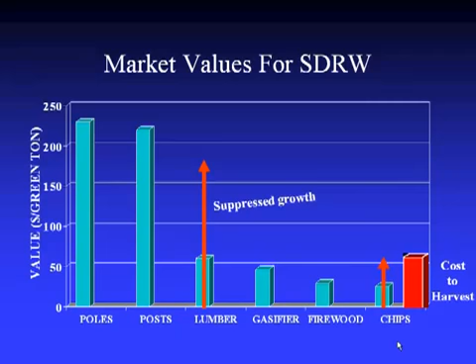So when we look at, and now this is mostly small diameter material, because that's the stuff we want to pull out of the forests to the ladder fuels that carry fire up into the canopy. If we are going to use that wood, we can see that it costs maybe $70 a ton to pull it out of the forest, and every 50 miles is another $10 to move that stuff. It's getting pretty expensive, and can they pay their way out of the forest is the issue.

So we can see that posts and poles have come way down with the housing market drop. We can see that lumber is moderately low, but then it went up if you had suppressed growth. I'll show you a slide where we're taking some slower grown wood, and you can actually make 2x4s out of a 2x6. So that made it more valuable, but then again with our housing market problems, that has dropped back

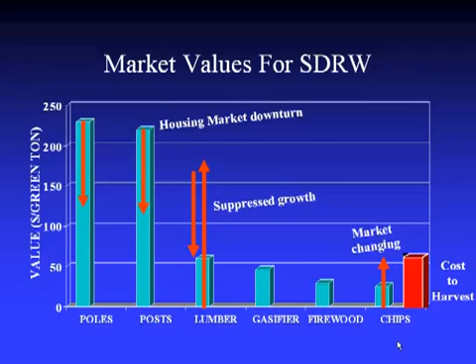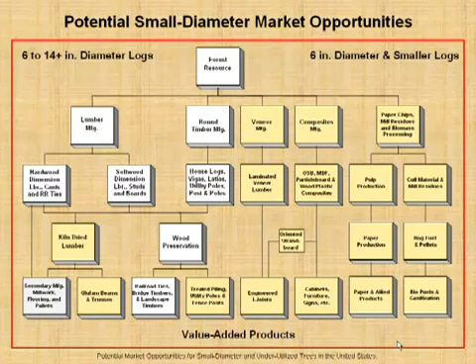down. So there's all kinds of things that the wood can be used for, and most of you people probably have some feel for which way you want to go or you want to investigate. And I'll throw out a few things in this presentation. And like I said, we want to come back and work out all the bugs before you enter into some of these things, because there were some issues where some people jumped on something and they made a few mistakes.

Years ago, there was a whole industry who were making wood foundations for homes, and that industry is gangbusters in Michigan, and it was a disaster in Wisconsin because a few contractors didn't follow the rules. It turns out it's a good idea in many instances.

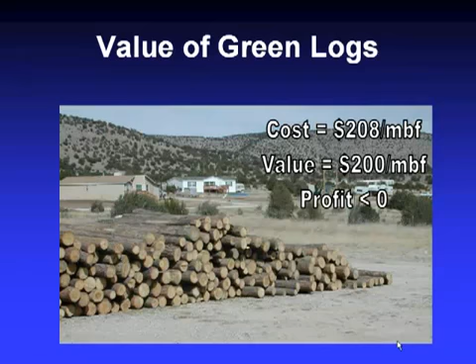So we can see here, you have some logs. They cost more to harvest than they're worth. Same sort of thing, it can cost a little more to turn it into lumber, and that value could also be less than what they are worth. However, this value added, this is a company that is in Northern California.

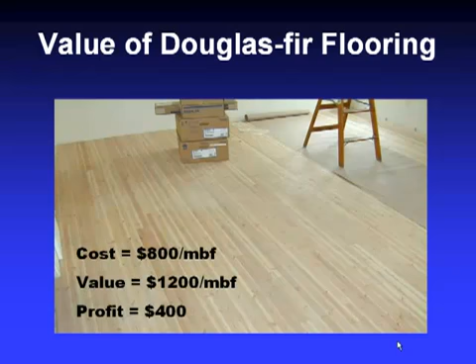They took very slow-grown Douglas fir, and some of these trees were more than 100 years old, and they were still only 4, 5, or 6 inches in diameter. So there's tons of knots, and it's a very pretty wood, and it's a whole new type of market. And the same sort of thing happened in Montana with some western larch. That was also an overlooked species, and it is paying its way out of the forest.

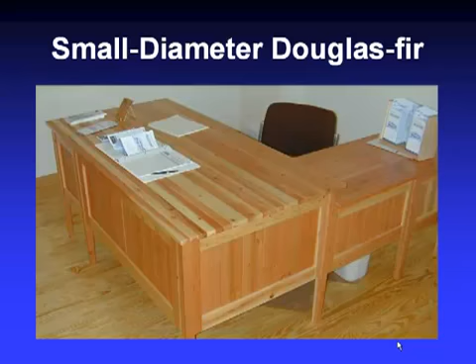Here's that same Douglas fir made into some furniture, and that's very attractive. So we can see there's all different types of things we can use the wood for. Unfortunately, energy is at the bottom end of that value stream as far as how many dollars we can get per ton. However, because the other things have been dropping, they're getting closer, and it's not such a bad deal

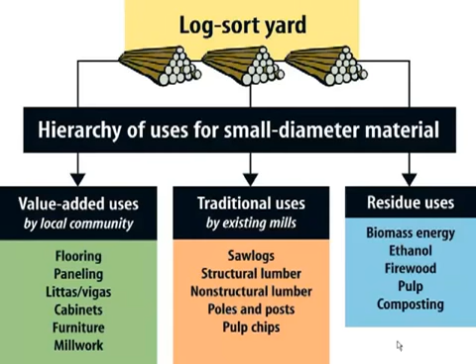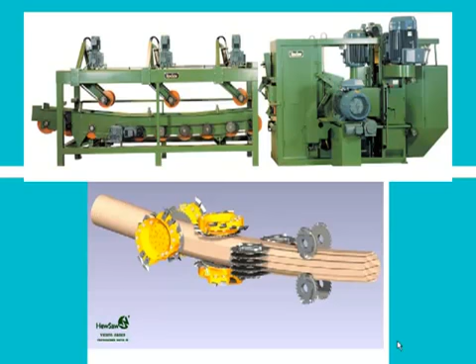anymore. Here's one thing: if we have some small diameter material and we put this in what we call a HewSaw, and there's some negotiations going on, and this particular machine may be coming back to the west. And here we can see the logs have to be sorted ahead of time, because this particular machine doesn't sort it, so you set up the knives ahead of time. It can get 20 logs per minute through this thing.

And so now like I said, we have to have the right type of wood. I have the little juvenile wood part of the tree. The very center is kind of flashing there, and the interesting thing about juvenile wood, it has a totally different cell structure. And if you ever went to the lumber yard and saw the 2x4s that were quite warped, if you look more closely, you may see that the side of that board that was warped up was the center of the tree, and that's where the cell structure is different.

It's usually 5, 10, or 15 years of growth where that is going on. If you have a very suppressed growth tree, that 5, 10, or 15 years may be only a ½ an inch, and then it's insignificant. So now we could have that juvenile wood on the side of your board, and it's not a problem. So that's why I was saying that older growth trees can still have a higher value.

Older growth, what do I want to say there? Suppressed growth. So older trees that are still really tiny still have value. If you took a 6-inch Ponderosa pine and ran it through here, odds are half your boards are going to be in bad shape, and Ponderosa pine does have some strength issues, so that might not be an ideal situation. So if you've got this forest and you saw this and thought, oh, I want to put this in, and you had Ponderosa pine, well, that would be a mistake.

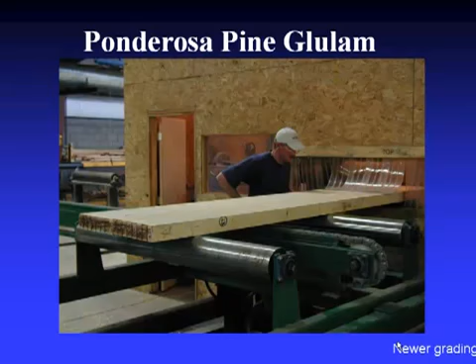Here we are taking some Ponderosa pine from larger trees, with a very careful grading process. If you ever understood the stresses going on in beams, we have a long beam. When there's pressure going down, there's a lot of stretching, so there's tension on the bottom of that beam, and there's compression on the top, and there's not much happening in the middle. So you can use Ponderosa pine easily all through that wood, and normally they would put Douglas fir on the bottom and on the top to handle those big stresses.

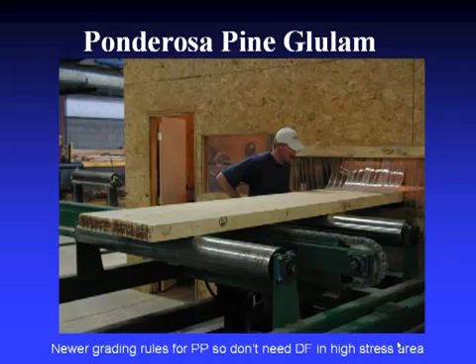With very careful grading, you can find the very best pieces of Ponderosa pine, set them aside, and then put them on the top and the bottom. So this is just an example of using some wood that typically might not have been good enough for beams, and now you were able to do it. Wood in the center can be quite poor quality. Finger jointing is another way to get around some defects. Always something to consider. Sometimes it's worth it.

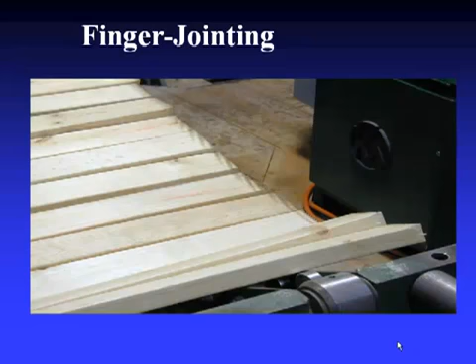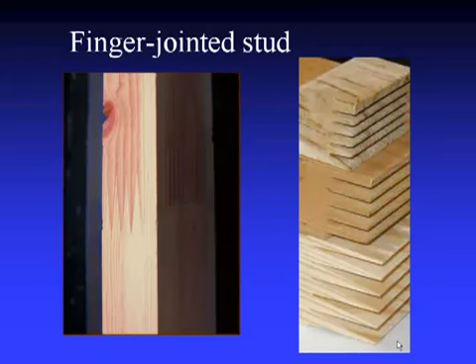And here's a little diagram of a finger joint coming together. That actually was very beautiful before we loaded it on here. It didn't have that red. So we have a demonstration house at the Forest Products Lab that we built 10 years ago, and it is an all-wood foundation and has all these other features. And every 2x4 on the interior walls is finger jointed, and every exterior board is a 2x6, and that's also finger jointed.

And you can see there's different types of finger joints. For ours, because they were all in compression, there's not a whole lot of stress, so this lousy finger joint works. If you're going to start putting more stresses on them and try to use them as a beam or something like that, you have to do everything right, because that finger joint can't fail. For the most part, it makes most sense just to do it where it's easy: studs.

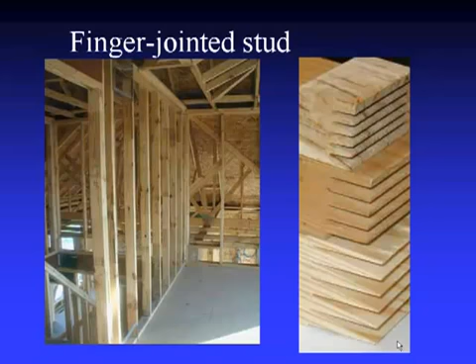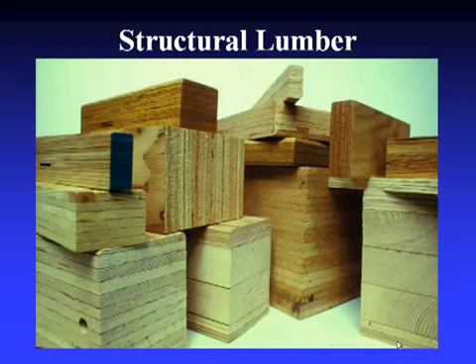You can rip apart boards in lots of different ways and then glue them back together, and then all the weaknesses of the boards are randomized in there, so your new beam is going to be much stronger than an original piece of wood, unless you had a perfectly clear specimen, and perfectly clear specimens are getting harder to find nowadays. So if you have small wood, that's what you have to do.

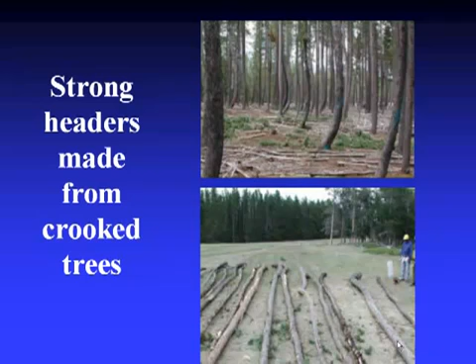This is our picture from Wyoming. We had some nice trees over there, and what can you do with these sorts of things? Well, we can do anything, and it's just a matter of how much you want to put into it. But if you were to take these pieces and with a very careful saw follow the tree and make very small pieces like 2x2s and then glue them back together in various forms, these things actually have pretty good strength. In this case, these were made as headers. That's the area above a window or a door. So they're not as strong as beams that are extending 10 feet, 20 feet.

These are shorter distances, but with this really lousy wood, they were dried in the 2x2 shape with weight on them holding them in place, and once they were dry, they maintained that. And when you glue them together, odds are you're not going to have all of them wanting to bend in the same direction, so they'll fight each other and it will stay straight. Normally, if you had one of those 2x2s perfectly straight when you pulled it out, and then it went through some wet-dry cycles, it would start to remember where it was. So these are things you have to be aware of if you're going to start using wood of lesser quality.

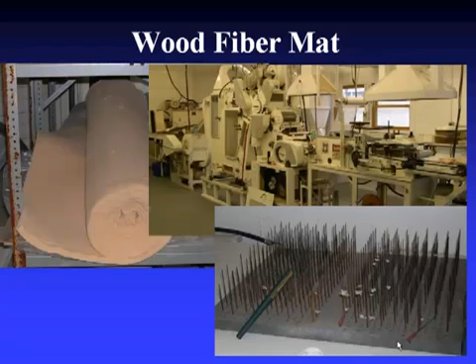So this hook system is right in here. So in the beginning, you're just throwing all this stuff in there. It kind of mixes it up. And in the mixing place, we have some opportunities to do stuff. I'll show you some in some other slides. But anyways, by the time you've done that and you've pulled it tight and you roll it out, you have a nice roll, and there's all kinds of stuff you can do with that. For instance, you could use it as is or modify it chemically to use as a water filter.

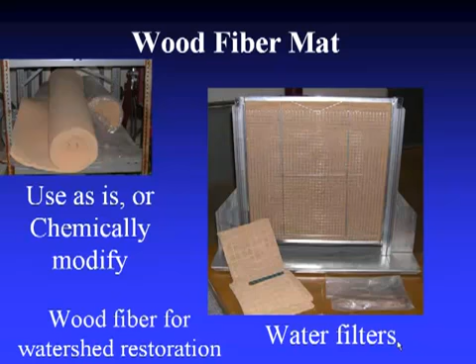Wood has kind of a negative charge, and so if you have something with a positive charge, you can extract it. So something like phosphate, the phosphate ion is negative, so that's the wrong thing to try and use wood for. So if you're wanting to clean up pollution for lakes and stuff like that, wood isn't ready to do that, but you can treat it so that it will be. Wood, because it has a negative charge, is all set for pulling metals. Metals have a positive charge. So if we have a mine and we've got iron, things that aren't so bad, or even things that are much nastier, the wood is ready to just suck this stuff up.

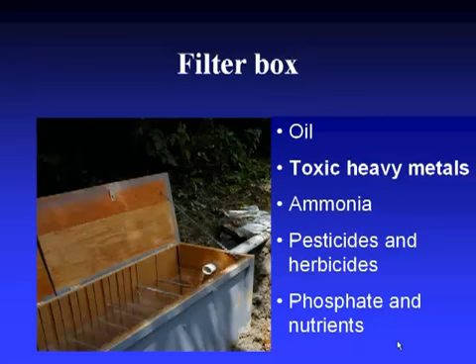I don't want to oversell this because we did have a professor that did oversell it. He was talking about using this in a mine waste area where the fibers soaked up the metal. Well, now when that, let's say it's iron, is on those fibers, the whole system has somewhat of a positive charge, and now it could suck up phosphates. And so the promotion was that they were going to take these mine waste filters and move them to the Adirondacks to clean up the phosphorus that was coming in. And of course, you don't want to put filters full of different types of metals in a pristine area to clean up the last little bit of phosphorus. So that was a ridiculous idea, and I don't want people to start thinking that you can do ridiculous things.

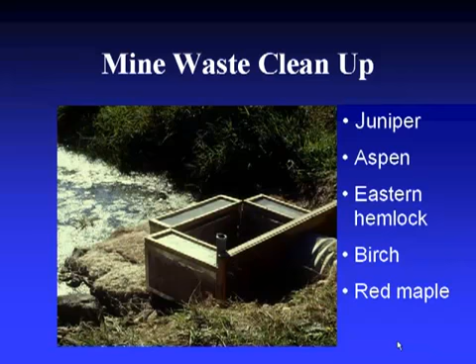In Seattle, they have some requirements for even parking lots to be clear. The water from the parking lot isn't supposed to go into the estuaries or into the whole watershed with the particulates from the parking lot. So they have a cute little filtering system. The water goes in, and this is kind of a flushing system, and basically the particulates filter out. It's just kind of like, if you're a guy, you remember the old urinals that used to slowly fill up and then they would flush. Well, this does the same sort of thing, and particulates are filtered out.

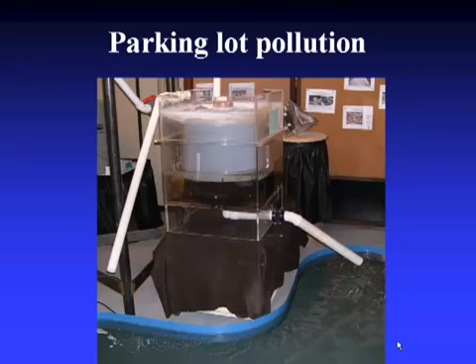Well, if you had wood in there and it was the proper charge, it could also be removing some of the other things that are in there. So they've got these setups in Seattle where there's 30 or 40 canisters in a well at the corner of a parking lot, and after the water goes in there, it heads on its way out, and it's cleaned tremendously. So in those boxes, they could have that wood fiber.

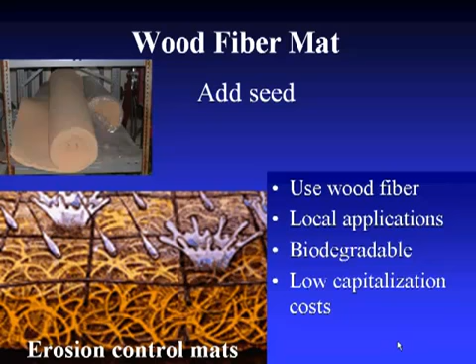Another thing you can do is in that process, we could have been adding seed, fertilizer, biochar, all kinds of stuff, and it could be rolled out as a mat for starting up in erosion control areas. And we did have some work with some space trips a long time ago where we actually impregnated them with seed, and it was a really nice foundation. So the astronauts, all they needed to do was add the water, and they had this plate, and they could grow their lettuce and some other things, so it was kind of cute.

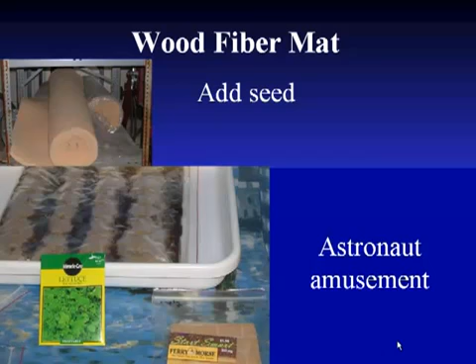So these are different types of using the fibers, putting them back together, and they work great for this type of erosion control. Stake them in, and you can then program how long you want that to last. And the program, of course, is by what species of wood you select. If you select cottonwood or aspen or some of these woods that touch the ground and they begin to rot, then we're going to have a fast disappearance of that, and we want to have a seed crop that's going to be taking over right away.

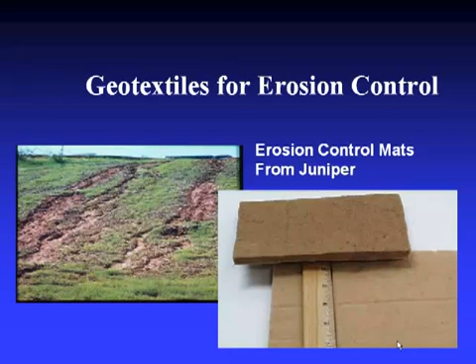If you have a species that's going to be needing a nurse or the friends around or some support for a longer time, then of course you'd pick a species that's somewhat more durable. Again, you have to be careful. You're not going to use black walnut, even though that does last longer. Black walnut, of course, is toxic to all kinds of plants.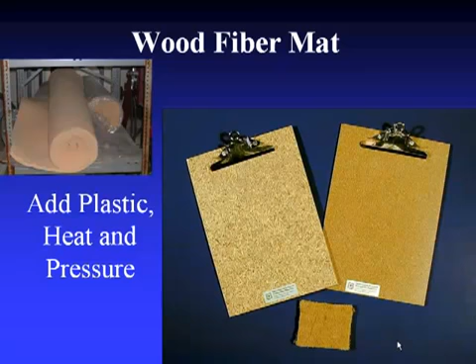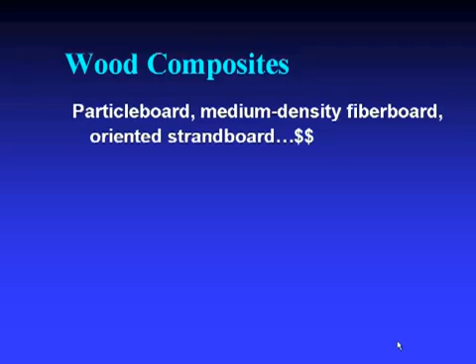In that whole blending process, you could have some plastic. Now this could be from recycled milk jugs, or recycling makes the most sense because that would be a cheap product, hopefully. And then all you have is this same web, and you just press it with some heat, and that plastic warms up, softens up, melts together, and then you let it cool a little bit, open up the presses, and in here we're making these little clipboards, and it's a really nice product. In fact, that type of product is in many cars now. It's been about 15 years that you've had it in the German automobiles, as those dashboards and things.

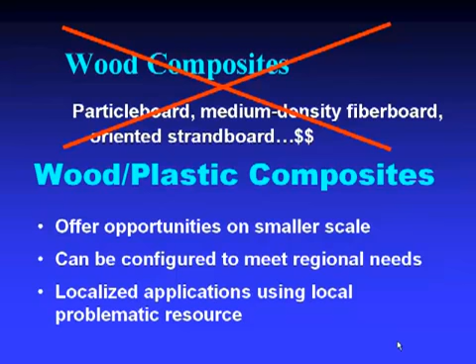I'm moving on to a slightly different type of composites. Instead of that mat, we're going to just mix stuff together. Wood composites we normally think of as particle board and fiberboard and all that stuff. Well, those are zillion-dollar operations. So my point is trying to get people interested, or helping people that are mom and pops or small organizations. So we can't be making that sort of stuff. But if you know of a company who's making these plastic chairs or some plastic table or something like that, and they're buying this virgin plastic, and I don't know what they're paying, 90 cents a pound for it.

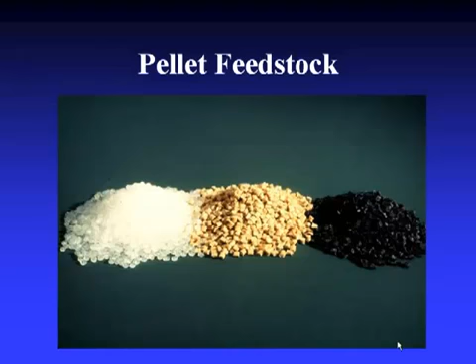If you can take wood flour and mix that with pellets and cut the cost way down. And wood, depending on how much you break it up, if you break it all the way down into a fine flour, it doesn't have a whole lot of strength. But if you break it into larger chunks, you have a much stronger product. So you can have these chairs that you sit on and the backs flop and break because they're so flexible; by adding the wood, they can be considerably stronger. So this is the product that they normally would buy. You add it to this, mix it together, extrude it out, and now you've got a product that is this. And because it's roughly the same size, this can go right into their machine. So it goes right into their extruder.

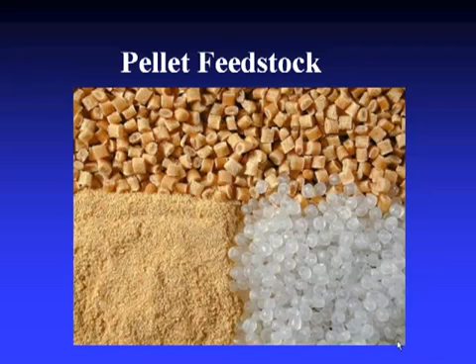The issue again, if you've got too much wood in there, it's more of a brittle product. And then even though that chair is very strong, you get 3 people on there, but when the 4th person sits on it, it explodes. That's a problem. So you have to temper how stiff it is versus how strong it is. So here's some of the car parts that have the wood plastic composite. Like I said, the back dash, the side panels, and your car doors and things, they're already out there.

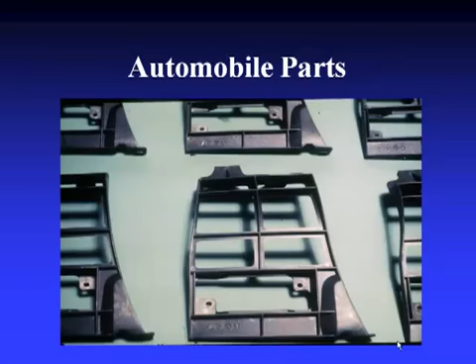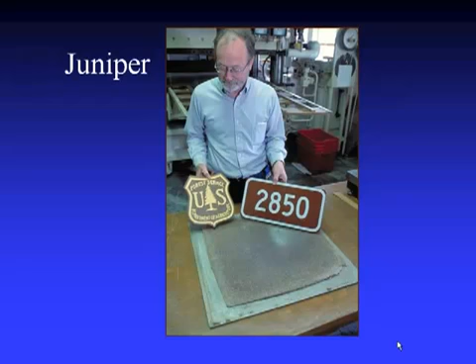Here's some juniper signs. This was made in more of a crude form. It was just the recycled plastics. This is in Albuquerque, and the schools were collecting all the milk jugs. They brought those in, mixed it with the juniper, and it's just kind of rolled around and rolled out. The whole operation is much more sophisticated now, but initially that was as basic as it was. Pressed it out, and you could have some stencils to make different types of signs. They had some definite advantages: the older wooden signs were eaten by porcupines. These signs were somewhat less tasty. They stand up quite well to bullets. So there's various advantages there.

By putting those ground up rocks in there, so it's a small portion, it's a fine powder, pigments, now we get a 50-year life out of this stuff. Well, it's got a lot of plastic in there, so it's got a burn problem. We put in fire retardants. We have a Class A fire rating, so now we've got a product that goes down in big sheets, so somebody can throw this down much faster than they would throw down regular wood shakes on a home.

The problem was we set this company up in a small town in Wisconsin. The company was bought by a Wall Street firm, and it turned out that for them to make their money back in their investment, it was going to take more than 5 years, so they canned the whole thing. So that really irritated me. That was, though, back in about 2004, when money was available and that sort of thing. Maybe today they wouldn't be so foolish, and somebody else could be setting up a process like this.

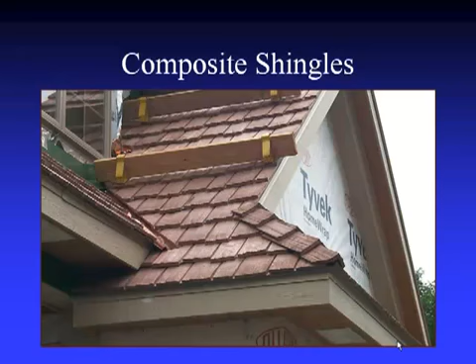So here's a little close-up. There's only one panel, and it's used over and over and over again, but you really don't see it if there's just some slight moving around. Now, you could make 2 or 3 different styles, and it would be even that much better. So they're able to throw this on the roof quite fast. There's also just plain extrusions. This is not the greatest market right now. It's kind of flooded, so we'll move on.

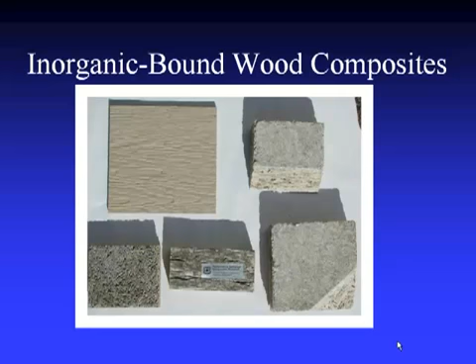This is mixing the wood fiber with cement to make a cementitious type thing. Normally, you see this Hardie board and some of these other siding products, they stand up very well. There's not a whole lot of wood in it, though. It's only 10 or 15%. But we've set up some sound barriers, and they work quite well. You can make any kind of shape you want. This is almost like egg carton type technology.

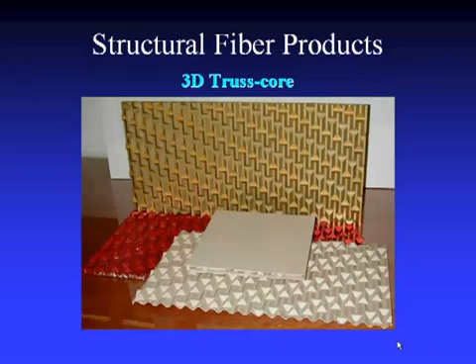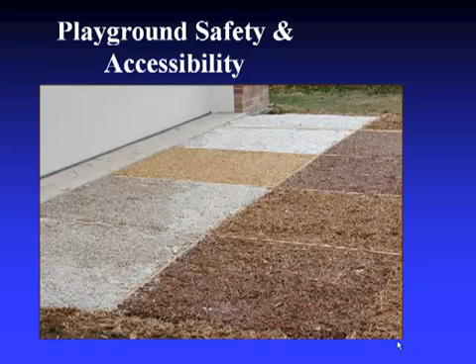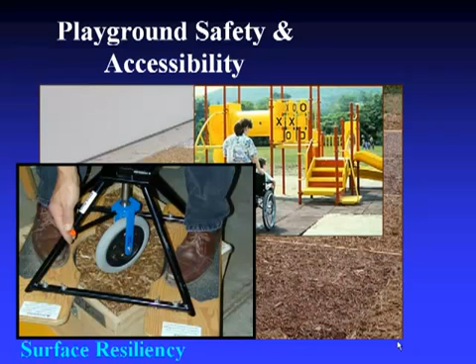Same sort of thing. This, instead of mixing it with something cementitious or plastic, we mix it with rubber, and it's very flexible. And now there's been some requirements from the ADA, so it's not fair that the kids in wheelchairs cannot play in the playgrounds, but we still want this stuff flexible. So by just mixing in a little bit of the rubberized material with that, it's very stable. The wheels don't dent it. We can drop a fake head in here, and it sucks up the impact very nicely, so it's a safe playground and something to think about. It's more expensive than normal playgrounds, but there might be niches for that market. It's kind of low right now because people don't have a whole lot of money for fixing up playgrounds.

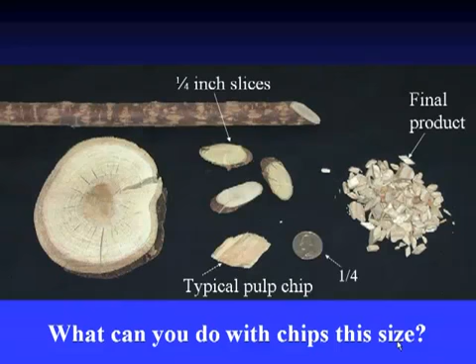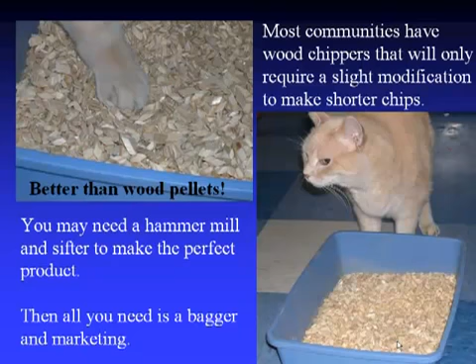This is a shavings operation. I almost got a company who made pellets to, instead of making a pellet, just break the wood into smaller pieces. And that operation, what can you do with that? Well, it turns out normal wood pellets in a cat litter will break into sawdust, and it actually doesn't work that well. But if you keep it in this form, it's phenomenal as a cat litter.

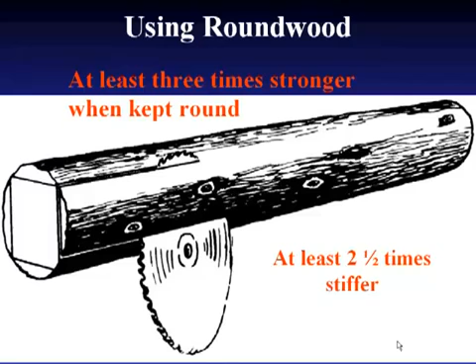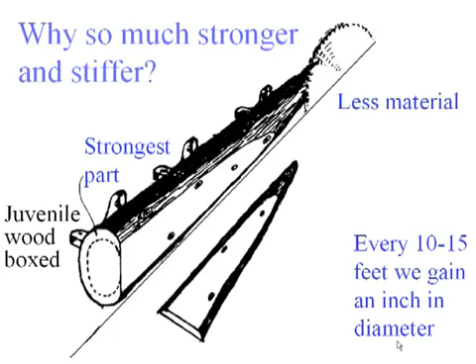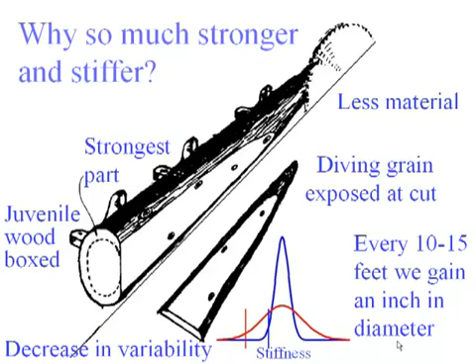If you have a round log and you make it into its biggest rectangular shape, the best you can do, your new square is 1/3 as strong. And typically it's much worse. It might be 1/10 as strong. And there's all kinds of reasons for it. I'm just going to fly through this rather than explain each part. But anyways, there's a whole lot of variability. When it's a round log, we know the weakest one is this strong and the strongest one is this, so it's a really tight band. When you cut it into a square, you're going to have effects from the branches that were growing out of there. We've got some weak spots, the knots. So we have a much broader spectrum. That's just one example. Roundwood is pretty neat stuff.

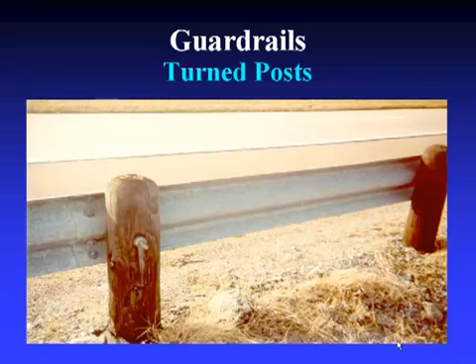So we got these certified for, it's funny, every time you develop something new, you have the issue of can you really use it. So we got them certified as road barriers. Well, this was prettier too, so this will come out funny.

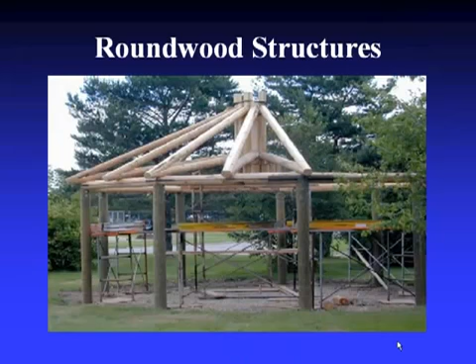So now that can hold 1,000 pounds when one board only holds 100. So it's kind of neat. So there's all kinds of things you can do with the roundwood. Here's a structure we built on our lab site. It's our little picnic pavilion now.

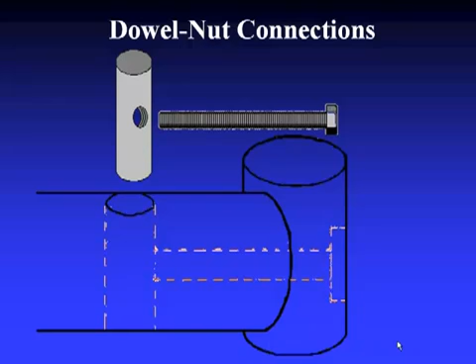There's some things that have been expanded. Different connections is the most important thing. Roundwood is very strong, so the most important thing is how you hook them together. If you have one log coming, you drill a hole in it, a 2-inch hole. You have the kids in the shop, high school, drill a hole in a piece of steel, and you drop that in there, and then you can thread a rod into there, and that will be a roundwood like this.

And if you were to pull on this, this will hold 20,000 pounds before this log starts to break. This is just a 6-inch log, 20,000 pounds. You put these little hose clamps on here, now this 3/4-inch rod starts to stretch at 40,000 pounds. So that's what you like, a nice stretchy ductile failure. If you got these all lined up and one pops, if it was the brittle thing, then it would all catastrophically fail. If this had too much stress on it, then it would just stretch and then they'd all equalize out and it'd be a nice operation.

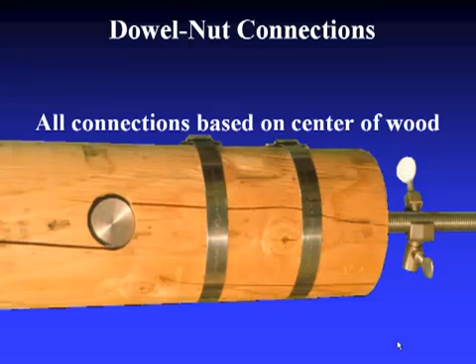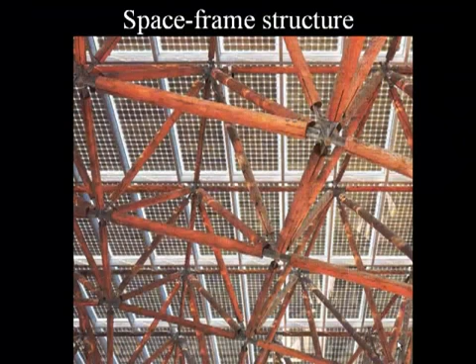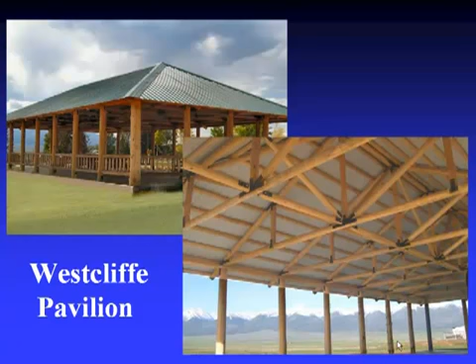So this is what's holding together the kiosks. It's holding together a big gymnasium up in Washington State. Different types of space frame structures. Here's a pavilion in Colorado. Very pretty. You can just put plates on here. It's not a sophisticated method, but people are happy with it. So they just bolt on, or screw on little plates, and then there's a big bolt that carries the load from one member to the other. So there's all kinds of roundwood structures.

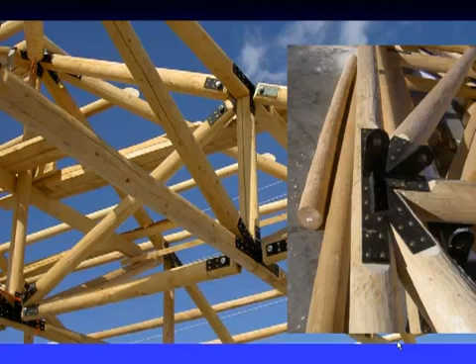The guy who welds these together usually has to take medication.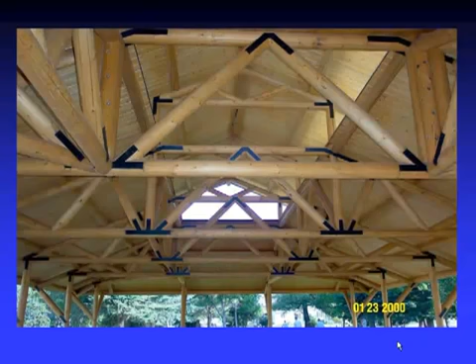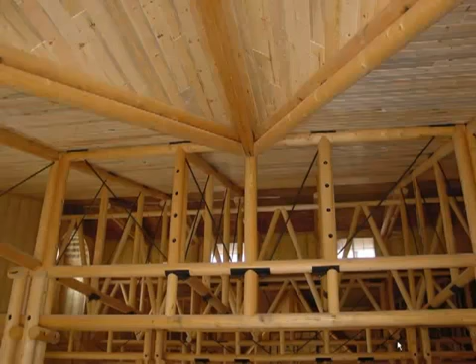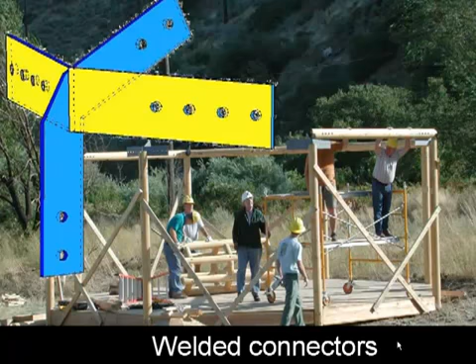This kiosk was in Ogden. We went and looked for it yesterday at the new place it was supposed to be, and we found the foundation, so we don't know where that is, but the school system, or the city park system, has it. And here we are throwing that kiosk together. This is another one. This one's in Idaho. So just quick demonstrations of what you can do with roundwood.

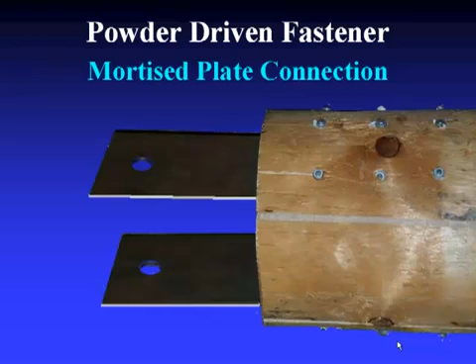There's all kinds of connections. This is another type of connection. All you do is cut a slot in your log and drop in an 1/8-inch steel plate, and you can use nails that you shoot with a concrete gun, with 22 shells. We call them powder-driven fasteners. One nail's worth 1,000 pounds. It has to bend on each side of that nail. It's kind of neat. So it's worth 1,000 pounds.

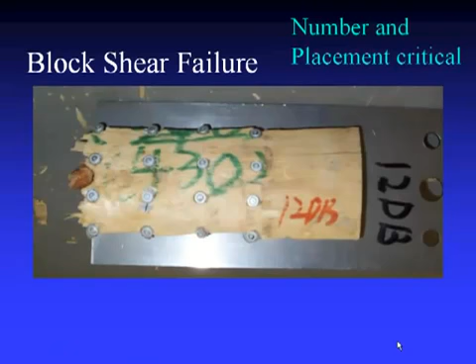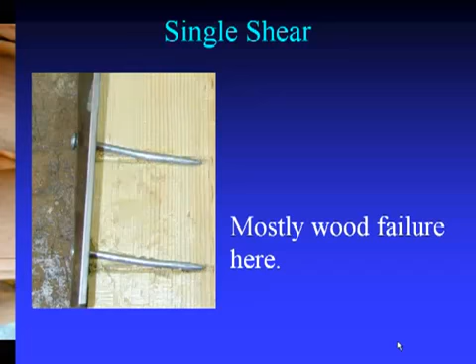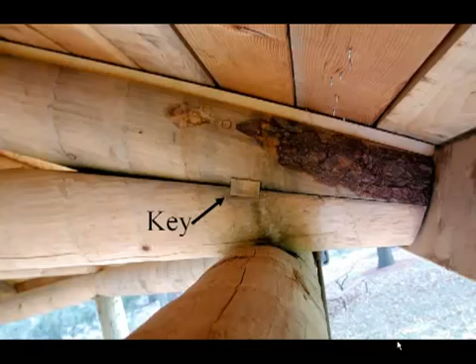You got to do it right, though. If you line them all up, you'll break the wood that way. If you line them all up this way, you'll break the wood that way. So this is stuff you have to do right. These people worked on some plates on the outside. Now the nail only bends once, so it's only worth 500 pounds. If you have a bottom of a truss and you put a bolt through it, that doesn't have anywhere near the strength of just a little piece of wood, a key, because it's spread out over a long distance. So here's some beautiful connectors.

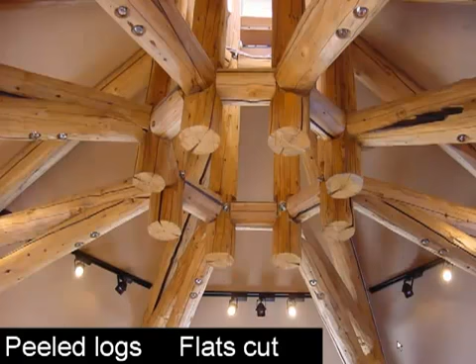This is the kiosk that's in Ogden someplace. This is the kiosk that's all rough. I like this design better. These are the ones over in Heber. These were set up for the Olympics. And there's some options for, I'm done.

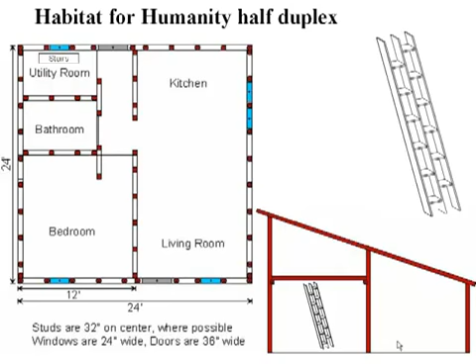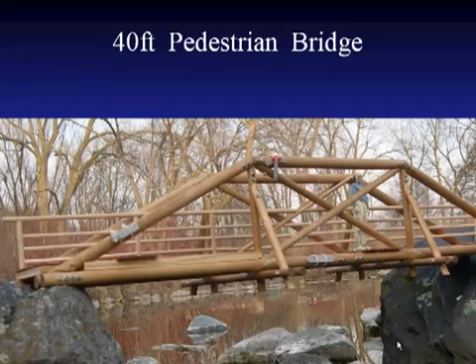This is Habitat for Humanity, and I've got some stuff here. I can talk to anybody who wants to know about that, and then I just have some bridges. So 40 foot's easy if you need to put a bridge together. Want to ask some questions? Yeah.